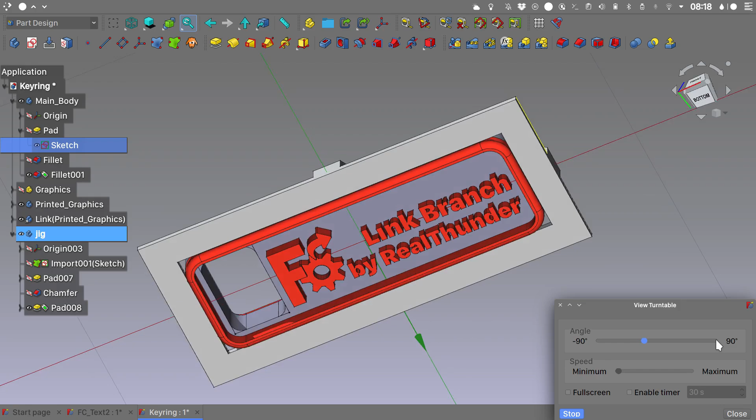In this video I will cover how to model our design in FreeCAD, how we can use Inkscape graphics for text and other shapes to be later imported in FreeCAD and used as a basis for extrusion. Then we will see how we can control our single extruder printer to create a multi-layered multicolor print.

Before we start, it is useful to do a quick recap of the softwares used. For FreeCAD, I'm using realthunder's link branch, and the latest release at the time of making this video is 0.1.11. You will of course find all the links necessary in the video description.

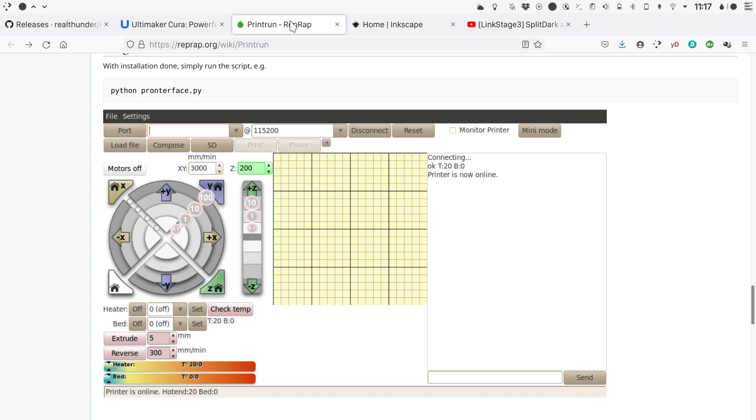We will use the Cura slicer for slicing our design, and in order to control our printer and achieve the multicolor layered print, we need to communicate with the printer via USB, and for that we will use PrintRun - a really simple to use and straightforward software for directly communicating with your printer.

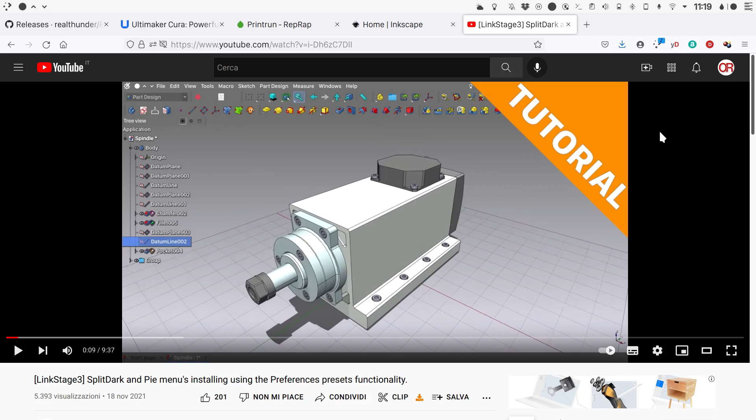For the SVG graphics we will use Inkscape, and if you like the way FreeCAD's interface is set up, there is also a quick and simple tutorial that I made on my YouTube channel, and you will find the link in the video description for that as well.

Okay, so assuming that our desired result is this 3D printed keyring, let's take it step by step and see how we can achieve our goal.

We start by firing up FreeCAD link branch and creating a new file. We will save this file as keyring, and as a first step we will switch to the Part Design workbench, and we will create a new body.

Right click on the body's name and we can rename it - I will call this body main body. Inside this main body container, let's create a new sketch. We will map it on the XY plane.

Okay, let's start by creating a rectangle. With the latest release of FreeCAD, we have some new options as well as some shortcut changes in the sketcher. I will choose a centered rectangle.

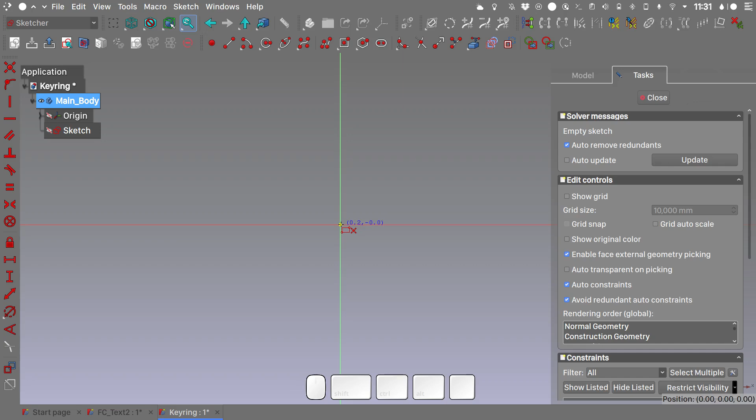Hitting the center origin of our sketch, I will create this rectangle, and you see that it is already constrained symmetric to the sketch origin. Select this edge here, and by pressing L on your keyboard we will give it a 60 millimeters length.

Of course you can always use the constraint icons, and the tooltip will give you a hint about the new shortcuts. I want this edge here to be 20 millimeters, so I on the keyboard for a 20 millimeters length constraint.

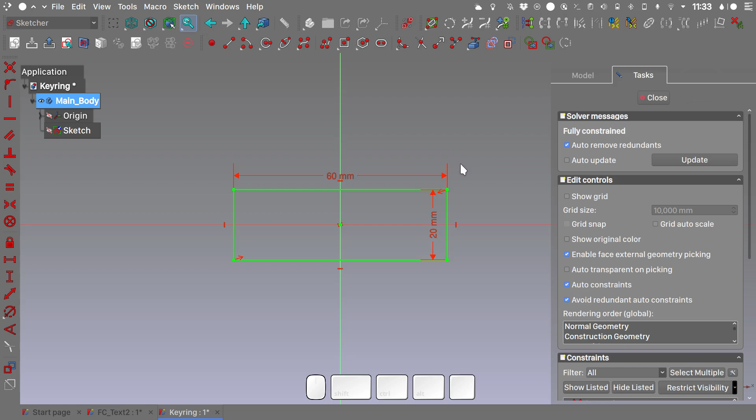If we take a look at our original file, switch to top view, we have this opening here, and I will model that as well.

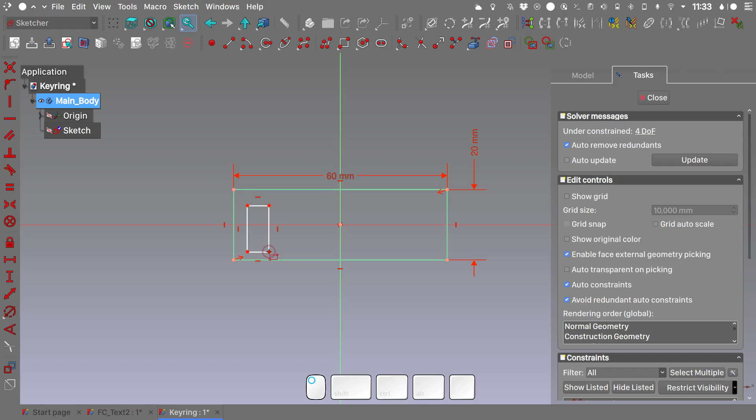So let's switch to a regular rectangle. We will draw a rectangle here, right click to dismiss the tool, select these two vertices and the x-axis of our sketch, S on your keyboard for a symmetry constraint.

Now switch to construction geometry. I will create a rectangle, right click to dismiss the tool, select these two edges, E on the keyboard for an equality constraint, and I want this edge to be L for a length of 2.5 millimeters.

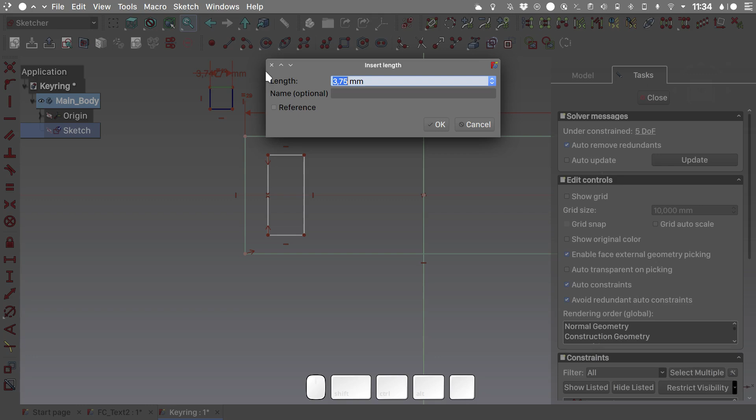Now what we will do is select this vertex and this vertex here, C on the keyboard for a coincident constraint - Ctrl Z, because I didn't want that. Let's try again - I want this vertex here and this vertex here, C on the keyboard for a coincident constraint.

And I want to do the same thing with these two vertices, C on the keyboard for a coincident constraint. Now we know that this edge here has a 15 millimeters dimension, and we can confirm that if we change to reference constraints - you can see here, 15 millimeters.

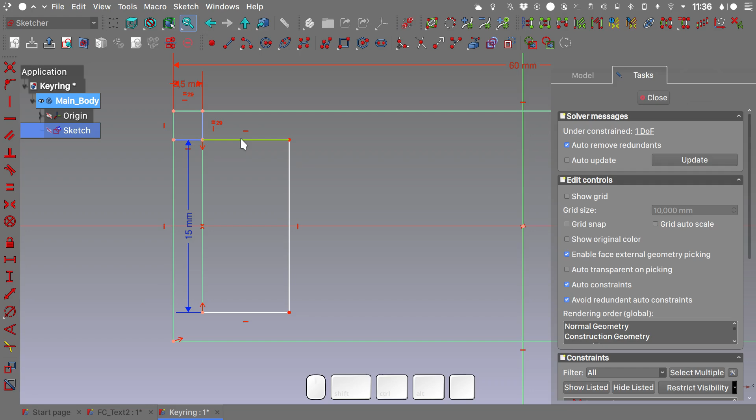Let's switch back to normal constraints. I want this edge here to be 10 millimeters in length, so L on the keyboard, 10 millimeters. Now with our sketch fully constrained, we need to close the sketch and we will pad it for 5 millimeters.

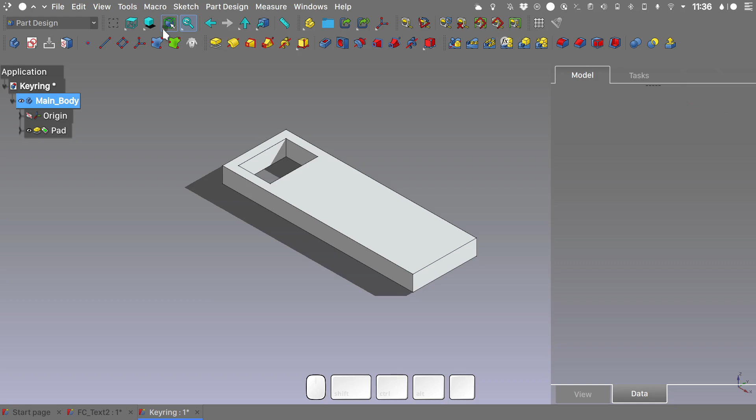I will switch to shaded view. You can also do it from here. You can switch through the various display modes.

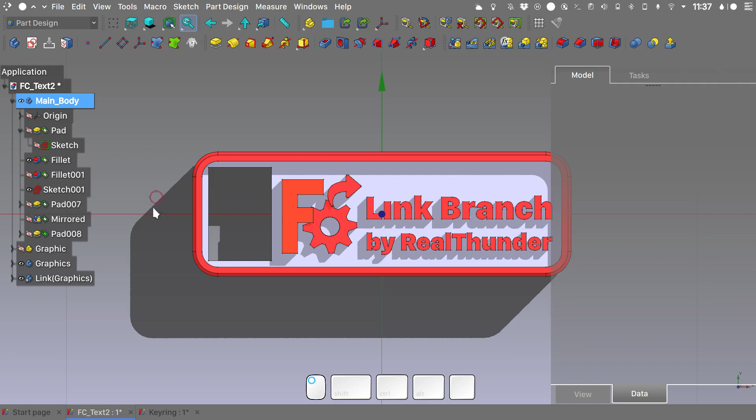Select our main body, Ctrl D on your keyboard to set a shape color. I want this shape to be something more dark, to reflect a little bit the color of my black filament. We will close this task, and taking a look at our reference model, we can see that we have some fillets.

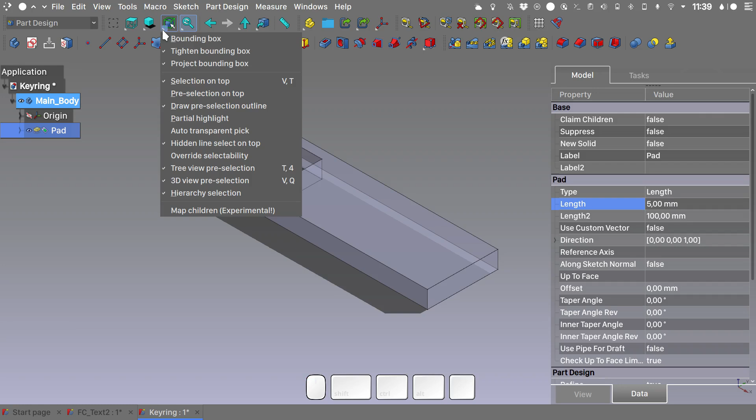So let's go ahead and model those. Select this edge here, and in LinkStage3 you can see how there is this really useful feature where the model becomes transparent and will permit us to select occluded edges or faces. This can be enabled from here, and choose selection on top if you want it, and this will help us select edges that are occluded by the model.

So use Ctrl on your keyboard to select multiple edges, and we will use the fillet tool to do a 4 millimeters fillet. Hit OK. I think that I want these edges here also filleted. So we will create another fillet, and this time perhaps 2 millimeters will be okay.

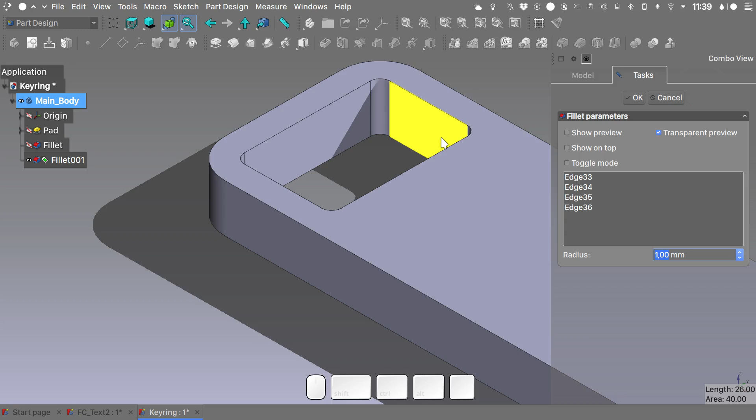So press 0 on your keyboard for an isometric view, and essentially with this we've quickly managed to model the base of our print.

Okay, so at this point, looking at our example file, we see that we need to create the graphics for the text and the FreeCAD icon. To have maximum flexibility, we will use Inkscape for this.

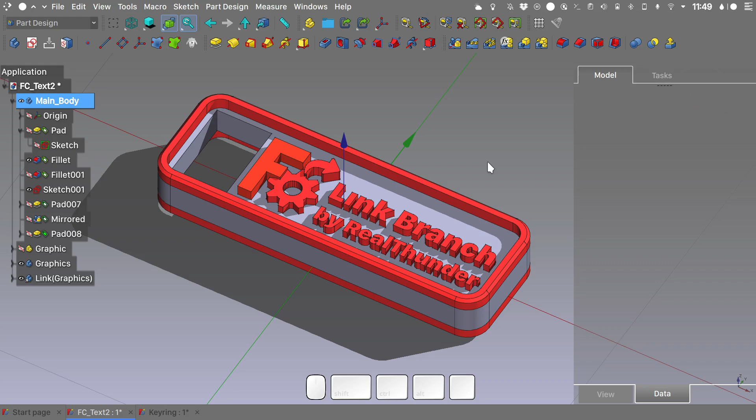So let's get back to our file, and let's try to have a better idea of the space in millimeters that we have to place our graphics.

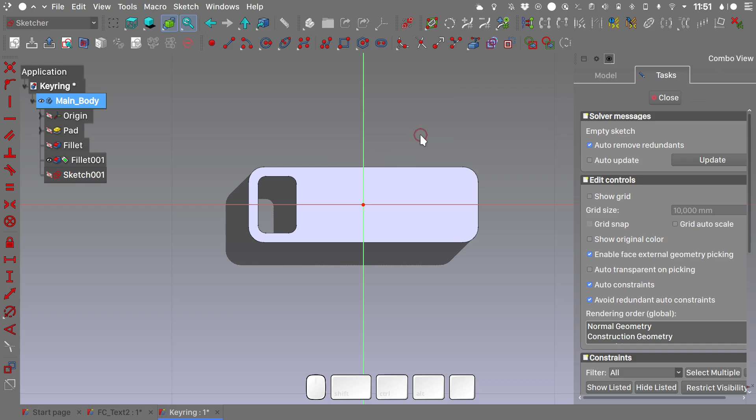I will create a new sketch only for reference on the XY plane. Okay, let's switch to wireframe view. I will create a construction rectangle.

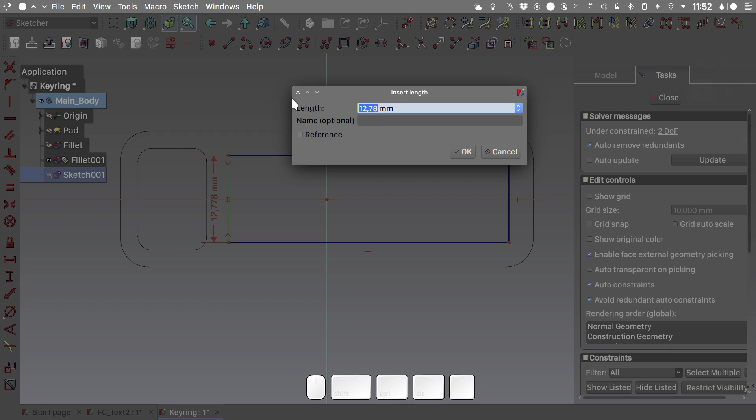Let's select these two vertices and the y-axis and the x-axis of our sketch, S on the keyboard for a symmetry constraint. I want this edge here to be I on the keyboard 15 millimeters, so it will match with our hole, and I think that this edge here could be L on your keyboard 43 millimeters, and we're pretty much inside our print area.

We need to keep in mind these dimensions, because the Inkscape file will use these dimensions for the page. So with these dimensions in mind, let's fire up Inkscape, and I will simply open the FreeCAD link branch icon.

Let's click OK. And in order to have an easier life importing in FreeCAD, we need to tweak some document properties in Inkscape. If we remember well, the width of our document is 43 millimeters, and we need to change the unit here in millimeters.

So width 43 and height 15 millimeters. Press 5 on your keyboard to see the whole document, and this way we make sure that we stay in the area that we have free for printing.

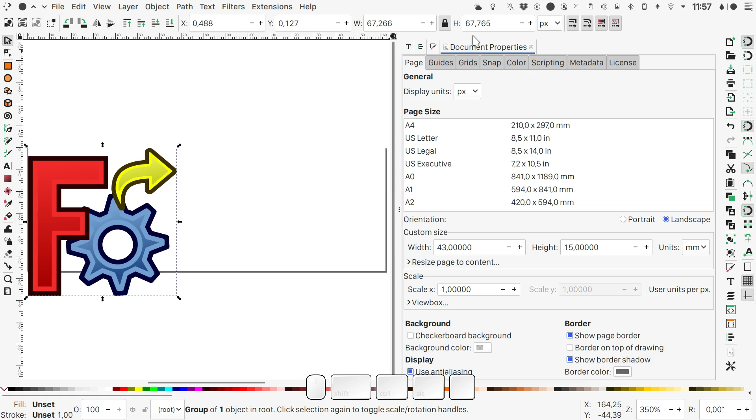Let's select our icon, and because I want to preserve the aspect ratio, I will hit this lock icon, and I will make it a height of perhaps 12 millimeters.

And of course we need to change the unit here as well in millimeters. Let's try again, 12 millimeters.

Click the Align and Distribute icon. I will select the page as the relative reference, and I will center the icon on the page by clicking this, and I will also move it all the way to the left.

Now we will create some text. With our text created, we need to be aware of the fact that FreeCAD will have difficulties importing SVG graphics that are not in a path format.

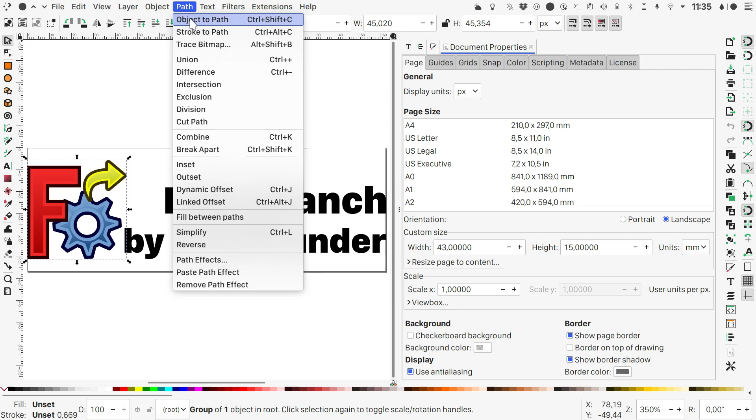So with this in mind, we will select our icon here, we will go to the Path menu, and we will select Object to Path. The same thing we will do with the text, so select the text and Object to Path, by realthunder Path, Object to Path. Now that we have our file ready for importing in FreeCAD, we will go to File, Save As.

I will save this file as path graphics as SVG, and as file format plain SVG. And let's get back to FreeCAD.

This sketch isn't necessary anymore, so we can clean our tree by deleting it. It was just a reference sketch.

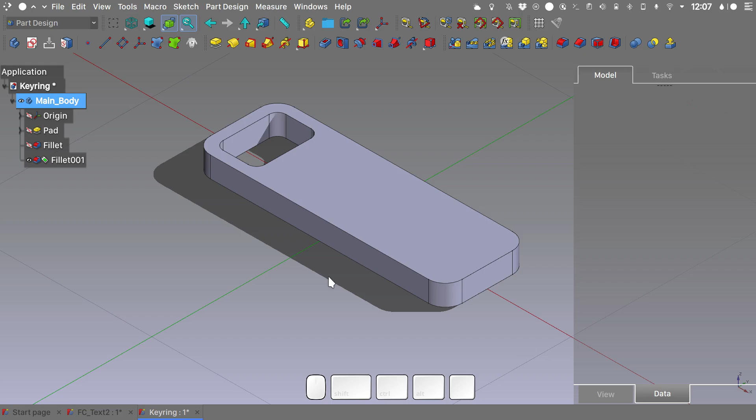Now let's go to File, Import, and we will import our path graphics SVG. We will import as geometry, select, choose yes, hide for a second our main body, switch to top view by clicking 2 on your keyboard.

One thing that I like to do is to group them under a new part, and this way you will see where the origin of this geometry is. So select all the paths that we have imported in FreeCAD by using Shift, and let's drag them inside our part. I will rename this part, and I will call it graphics.

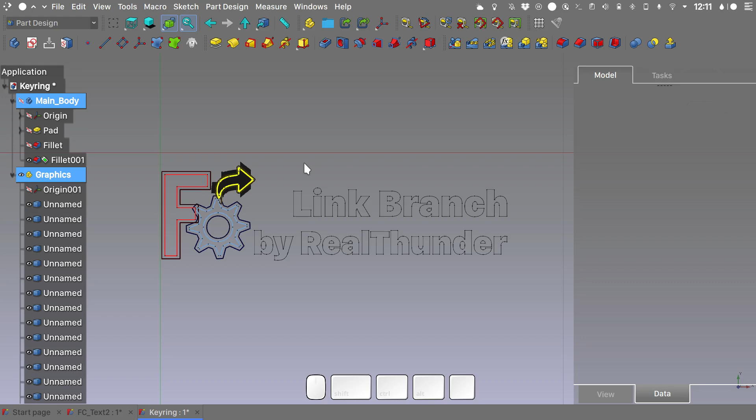Let's start the process of transforming these paths into something usable for the part design to model geometry. If we take a look at our example file here, we can see that the graphics are made by pads that take as a reference some shape binders. This just to make you understand what we are trying to do here.

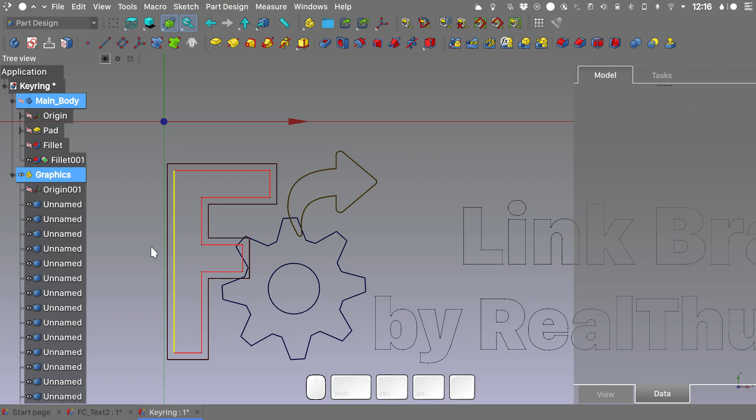Back into our working file, we need to clean this geometry a bit, so I will select some of the paths that I don't need and delete them. This one also. Hit delete on your keyboard. If you hover with the mouse over the various bits and pieces in the tree view, you have a highlight in the 3D view, so you can see what's going on. Also, because I've tried this previously, I know that this path here will be a problem, and I'm deleting it, so bear with me. Now our goal is to use these graphics as basis for pads.

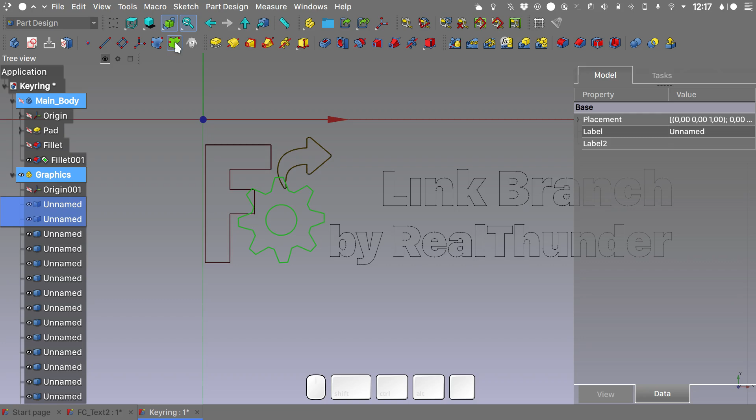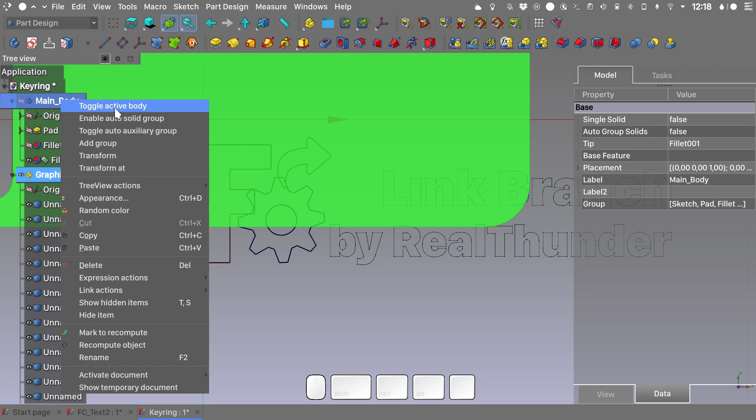To do this, we will use a really cool feature of the green SubShapeBinder, and that is the fact that it will try to detect closed areas and make a face if possible. Another thing to bear in mind is that at the moment we want to create our SubShapeBinders outside of these two containers that we already have. So let's click on the main body, and we will toggle the active body so it is not active anymore, and you can see that the highlight has disappeared. Also, we will toggle the active part.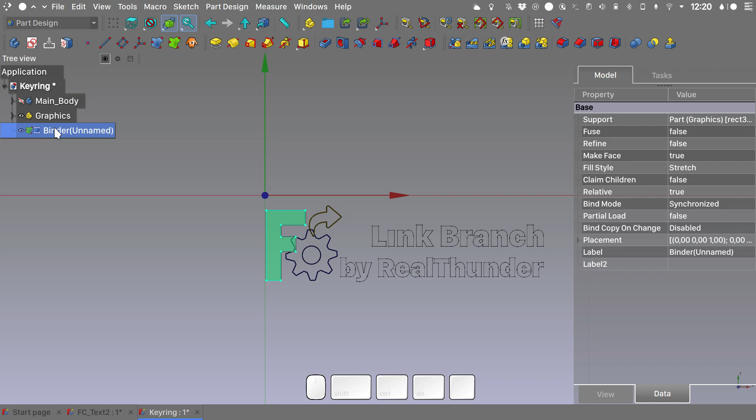So let's start this process with the path for this F here. Let's find it in the tree, select this path and hit the green SubShapeBinder. You can see that it has created the SubShapeBinder in the main branch of our tree. I will rename it, so F shape, and we will slowly do the same with the rest of the graphics.

If we take a look at our gear here, we can see that we have an outside outline but also the inside. If we select only the outside, the green SubShapeBinder will create a unique face. But if we select the outside path and the inside one, the SubShapeBinder will be smart enough to leave the hole here free. So let's try it and rename our new SubShapeBinder as Gear Shape.

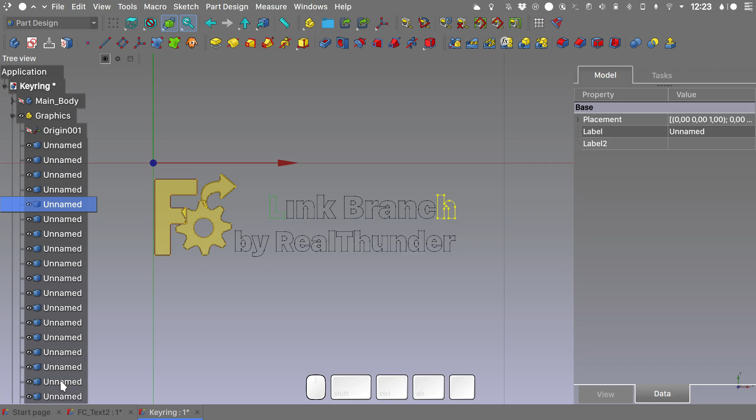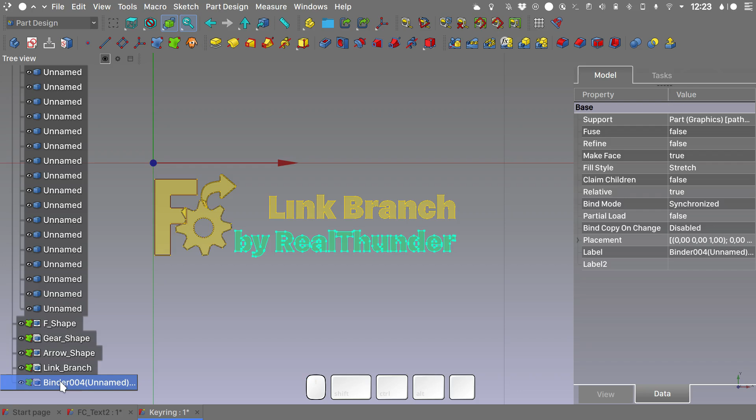Let's do the same with this arrow here, rename Arrow Shape. Now we need to move on to the text. So select the first path of the link branch text and try to find the path that represents the H. Hold Shift, select everything and hit the SubShapeBinder. Let's rename this as link branch, and we will do the same with by realthunder. Let's try to find the first element, hold Shift, select the last one and create a new SubShapeBinder. Rename it, and this way we have created SubShapeBinders for all of our graphics.

These SubShapeBinders can now be used to create pads or pockets in our geometry. Let's hide this. One important thing when you create SubShapeBinders: you need to make sure that the make face property is set to true, in order to have the face created when the ShapeBinder detects a closed area.

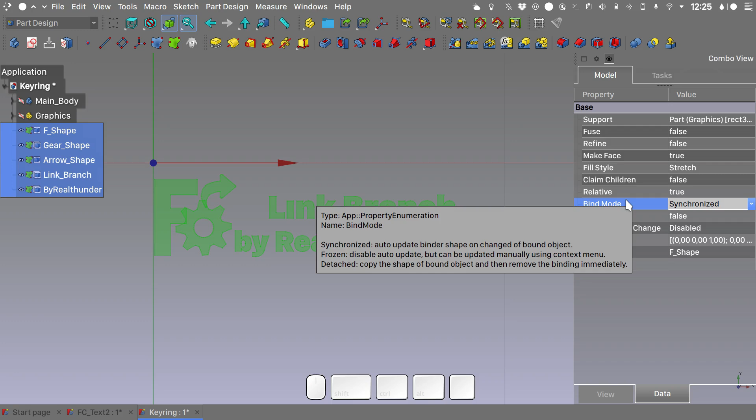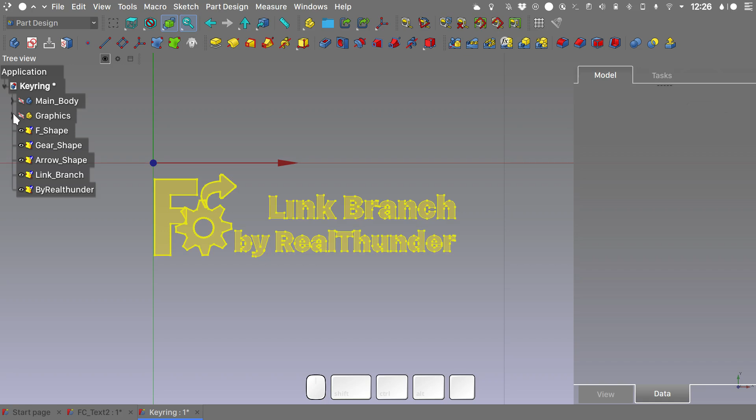Another important property of this SubShapeBinder is called the bind mode. By default, the bind mode of the SubShapeBinders is set to synchronized. It is really useful to read the tooltip for this property, because it will give you some really interesting insights into how SubShapeBinders work. For our model here, we need to set the bind mode to detached, and you can see that the SubShapeBinder icon has changed. What does this mean? This means that now the SubShapeBinder won't follow any changes made to the graphics anymore, so it is like a frozen in time geometry at this stage.

But also this will permit us to place the SubShapeBinders in a new body and move them freely in the 3D space. If this property is set to synchronize, the SubShapeBinder was designed to stay in place of where it was originally created and to follow the geometry of the binded object, and that is useful for top-down modeling.

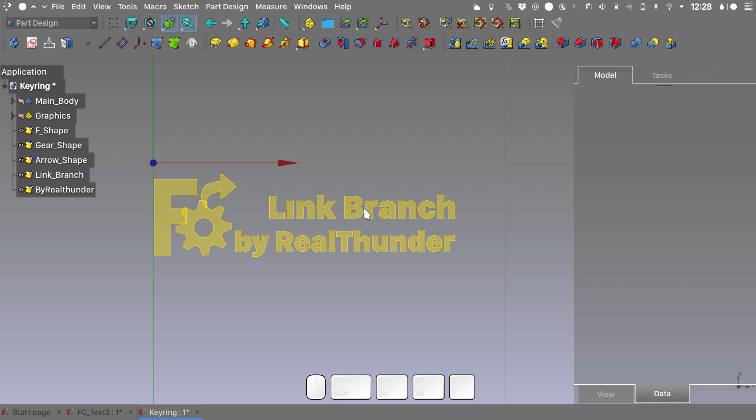Again, for our intent here, we need to have them detached. Okay, so now with our graphics prepared and ready for modeling, we will create a new body.

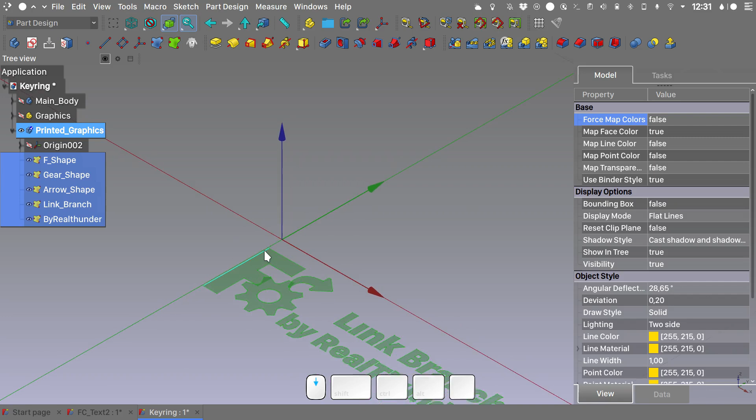Let's rename it as perhaps Printed Graphics, and selecting all of our SubShapeBinders, we will drag them inside our newly created container. We will select our SubShapeBinders because we want our extrusion to be red. Hit Ctrl D on your keyboard and we will set the shape color to something like a red color.

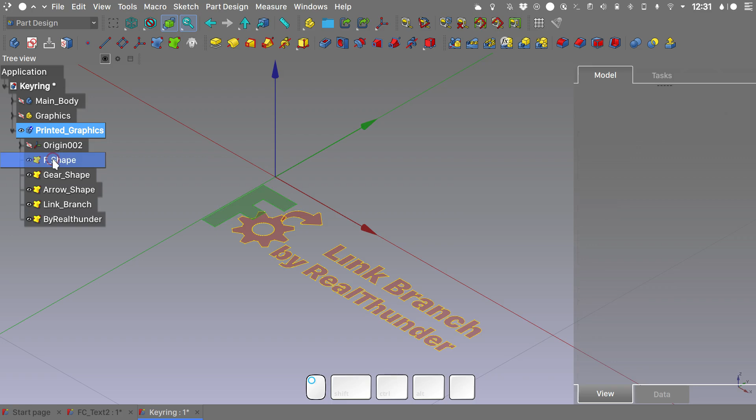Now, this hasn't done anything special, it only changed the color of the faces on the binders. And now if we make our extrusion, you can see that the F is now red. I want this extrusion to be 2 mm in height.

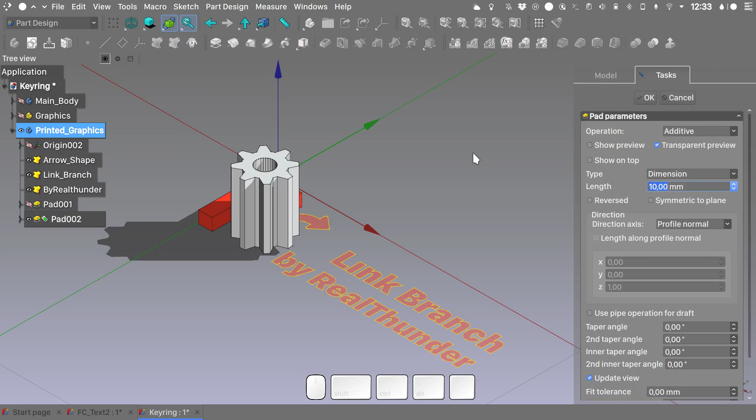Hit OK. Let's switch to shadow mode, and we will do the same with all the other geometry that we have here. I will pad the gear for 1.5 mm, and the arrow we will pad it for 2 mm also.

And with this we have created our graphics to be placed on top of the main body. What we need to do is to transform our shape. So let's switch to front view.

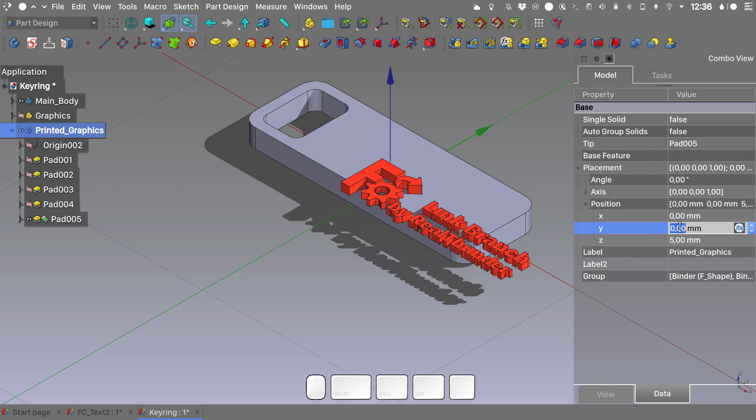Hit OK, select the printed graphics, go into data of the properties view and expand the placement entry position. We want our body to be in the Z direction at 5 mm, in the Y direction at 7.5 mm, because this way it will be centered with our main body.

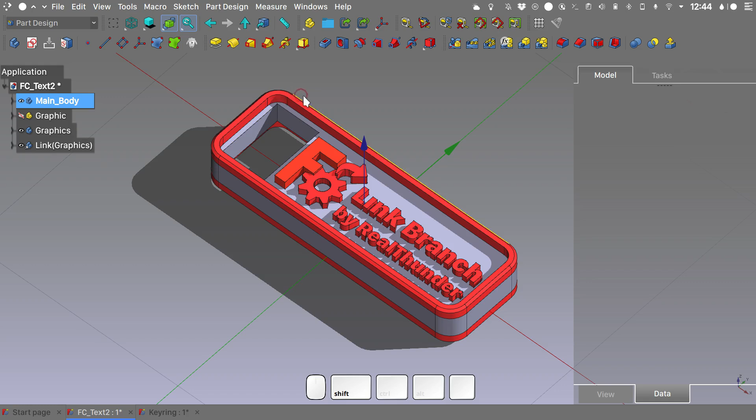So select it again, and for the X position we can make it something like -16 millimeters. Okay, so now if we take a look at our example file, we need to create this outer perimeter extrusion. So let's get back to our file.

With our printed graphics body active, we will create a new sketch. We will map it on the XY plane, hit OK. We need to import some external geometry, and I will import this arc here and this arc here.

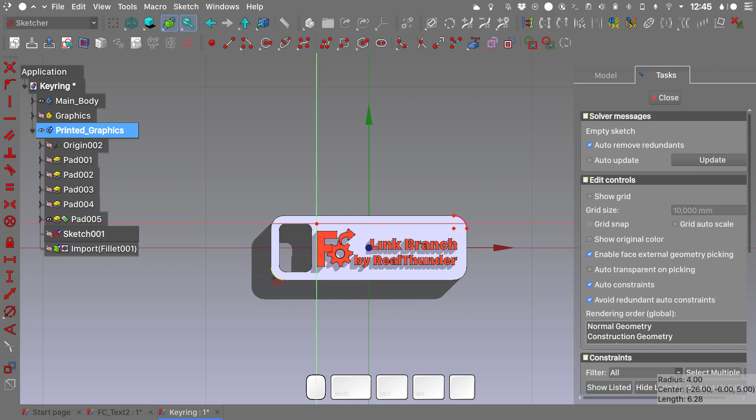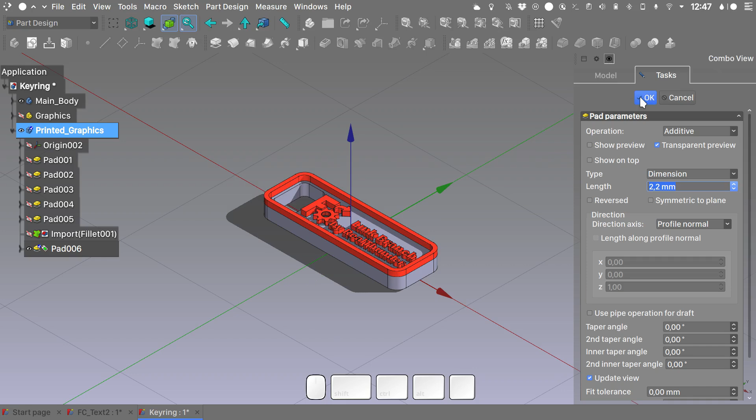Let's close our sketch, switch back to shadow mode. I will pad my sketch for 2.2 millimeters. Hit OK, and one thing that I would like to add is a fillet on this edge, and hit OK.

Okay, so we have our top body print modeled, and we need a way of creating the bottom one without going through all the modeling. For this, we will take advantage of the link functionality in FreeCAD, and with this technique, the advantage is that whatever changes we made to our printed graphics body will reflect for the underside.

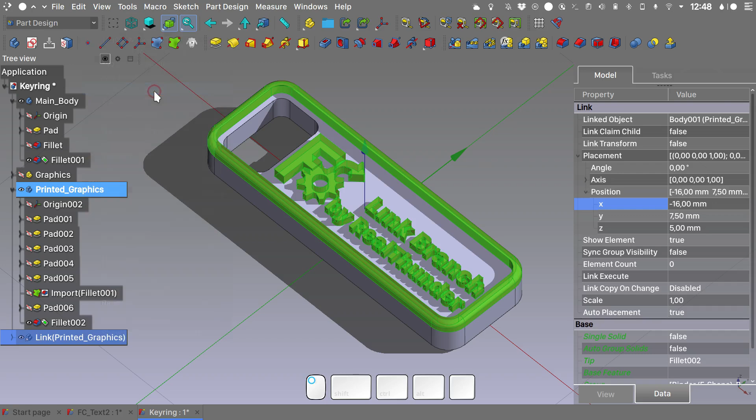So select the printed graphics, hit the make link icon, and we have a link of the printed graphics. Right click on the entry in the tree view, click transform, and we will rotate it by 180 degrees. Hit OK.

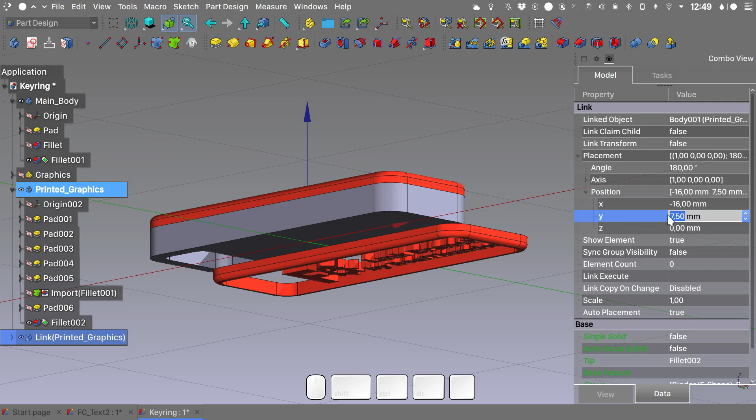If we select our link in the property or combo view, we will tweak its position, and I want it to be at 0 millimeters height, at 7.5 millimeters on the y-axis and -16 millimeters on the x-axis. And as you can see, we have perfectly placed our new body where it needs to be.

Okay, so this pretty much wraps up almost all of the modeling part of our tutorial. It is now time to get to our printer. So we will start with the easy part of printing with the black filament, the main body.

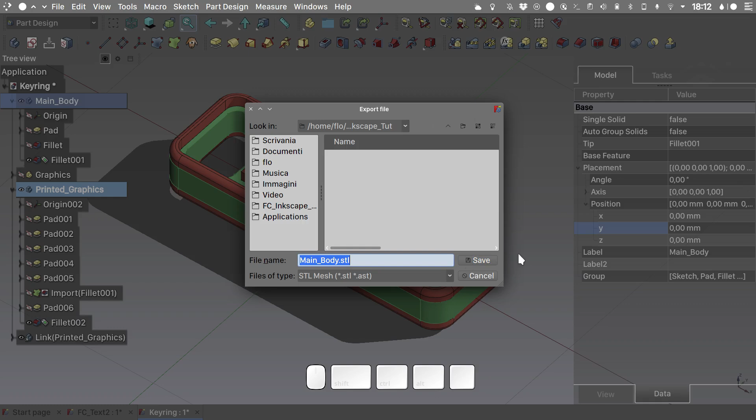So we need to select our main body container in the tree view. We will go to File, Export. We will choose STL mesh as file type, and we will name it main body STL. Let's save this export to a known location, and now it is time to fire up Cura.

And then let's open our file. So File, Open Files. If we select our mesh, one important thing that we need to keep an eye off is the positioning, which in this case is at the origin.

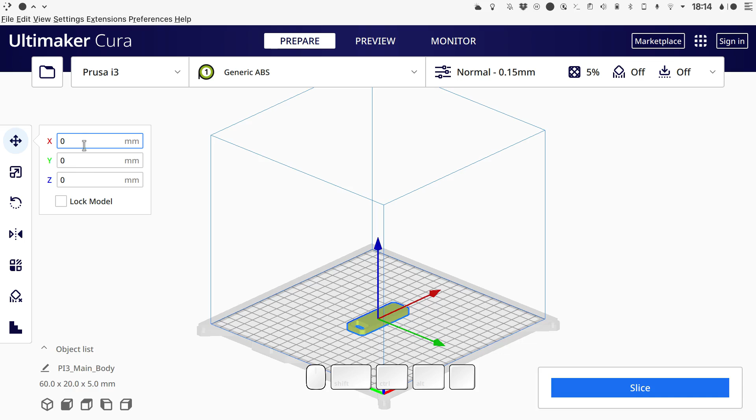As printing profile, I have a generic ABS printing profile, and because I know that this particular type of filament will shrink a lot, I usually scale my mesh by 2% in uniform scaling mode. Some other relevant settings in my case is the layer height at 0.15 millimeters, and I have a 5% infill density, and skirt as build plate adhesion, as this will purge the nozzle before starting the main print.

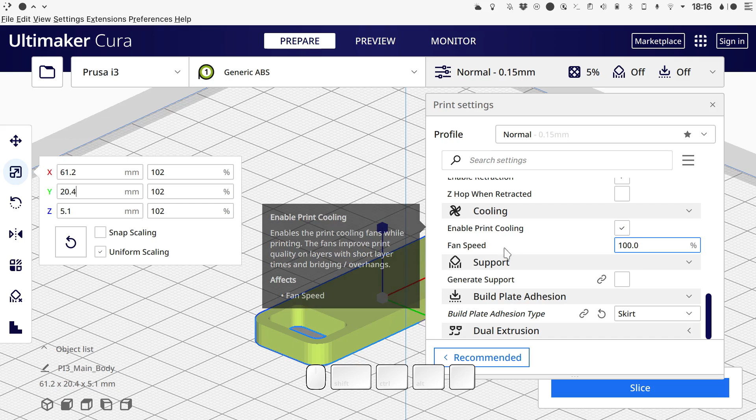Let's slice it and save to disk in order to send it to the printer, and we are finally ready to print our first component.

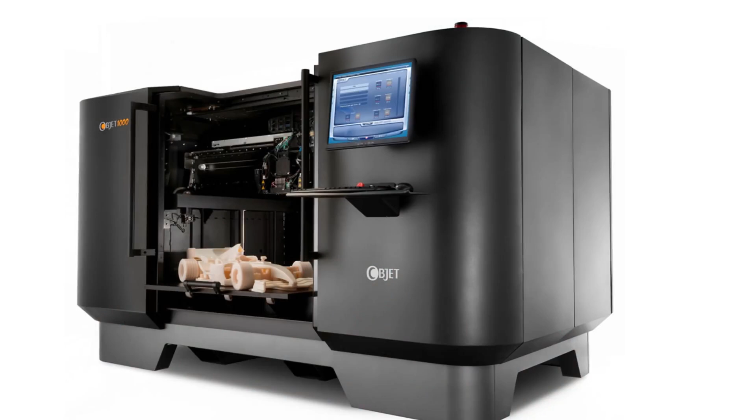Now that our first component is printed, we need to get a bit intimate and understand more how our printer works. Our printer is controlled by Gcode, the basic programming language used for almost all CNC machines, including 3D printers, routers, and laser engravers. It instructs the machine on how to move, heat, and perform other actions.

Most printers have a way of communicating with them via USB or Wi-Fi connection, and in my case I'm using a USB connection via an application called PrintRun. But of course you can use whatever application is provided with your specific printer.

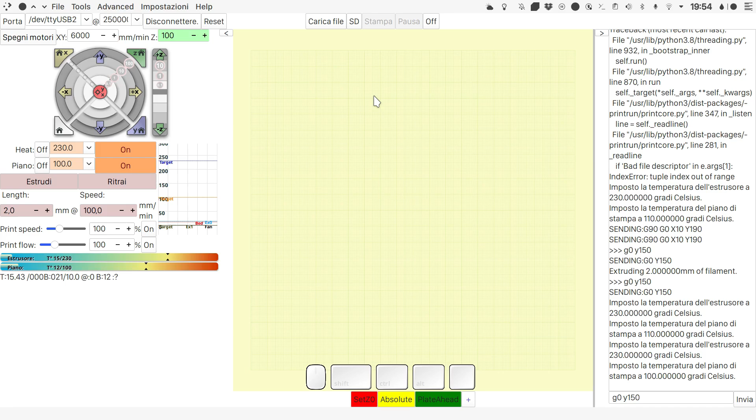So getting back to our design, we can see that we need to print our red graphics on top of our main body. Here rises the first problem that we need to overcome. When we slice this geometry in Cura slicer, it will include in our Gcode file a routine for homing all axes. The problem is that we need to print the graphics offset from the print bed, and for that we need to eliminate the z-axis homing routine.

Before we start, let's take a brief look at the G-codes that we might use for controlling our printer. The first ones are G0 and G1. G0 is used for rapid motions, as fast as our machine will go, moving the cutter or extruder through air to the next place it will be cutting or printing. Instead, the G1 code will feed the motion slower in a controlled manner.

The G90 and G91 codes are used to switch from absolute coordinates to relative coordinates. G90 switches to absolute coordinates, instructing the machine to use the absolute coordinates of the machine, while G91 instructs the machine to move relative to its last position.

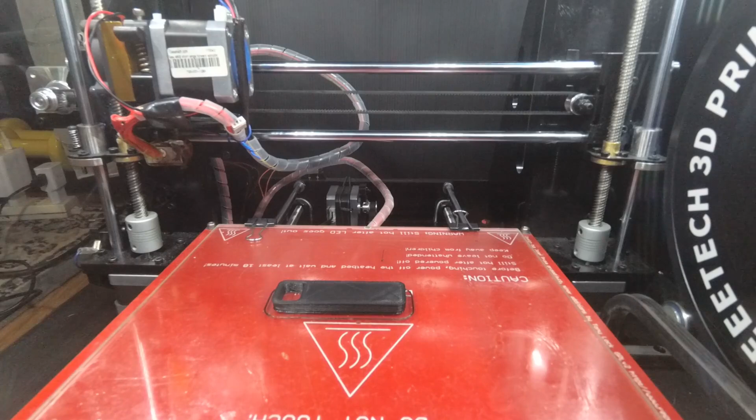Now that I'm sure the extruder won't crash into my print, I will home my y-axis. Here comes another command we need to learn: the G28 command, used for the homing routine. If we do a G28 x-axis and G28 y-axis, the machine will be homed in the X and Y direction, and this way we've issued our first commands to the printer.

Now that we are able to control our printer, let's take a look at the G92 command, which will be really useful for what we want to achieve. The G92 command on a 3D printer specifies the current location of the nozzle. Telling the printer where the nozzle is located may seem unintuitive, but this command can be super helpful, especially when it comes to setting offsets.

As an example, if we switch the coordinate system of our machine to G91, relative to the current position, we can issue a G0 Z minus 20 millimeters command, and we can see the extruder will move 20 millimeters down from the current position. If now we issue a G92 Z0 command, this will instruct the machine that the current position of the extruder is actually the Z0 position. This is essentially everything we need to print with an offset from the plate, but with the benefit of understanding how things work.

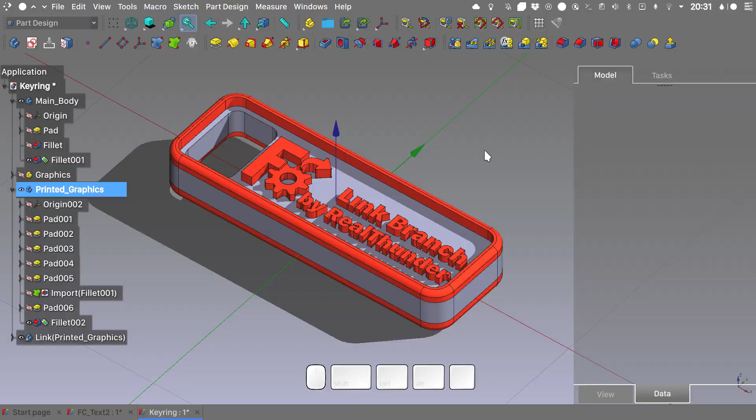Now let's get back to our file. I want to export the printed graphics, so I'll select it. Let's go to File, Export, and we will call this file Printed Graphics.

Let's switch to Cura Slicer, and I will import my printed graphics STL file. Let's select it and make sure that it is always in the 0 position, centered on the plate. Now in Cura we need to change some slicer settings, and the setting we need to change is the build plate adhesion, which we will change to none because it will essentially be printed in the air.

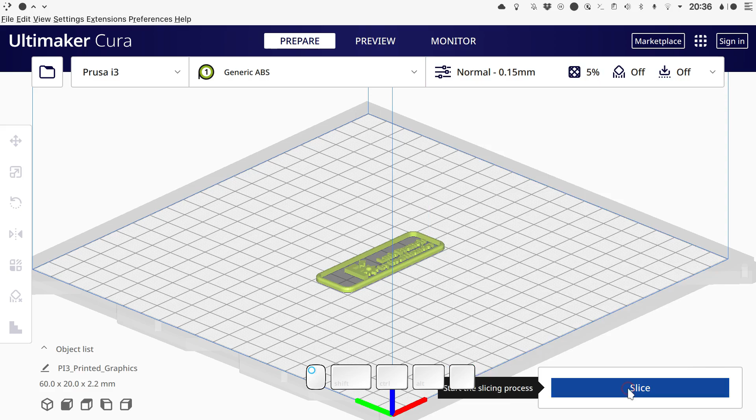Let's slice our mesh, save it to disk, and open the Gcode file with a text editor. We need to understand that Cura Slicer will rightfully introduce a homing routine for all axes, but in our case we need to avoid the homing of the Z-axis because it will crash with our previously printed object. If you remember, the command for the homing routine is G28, and if we look at the beginning of our file on line 24, we have a G28 Z0, which is the homing routine for the Z-axis.

We need to get rid of this line of code and leave only the G28 X and Y homing routines. We eliminate the Z homing routine because we will manually set the Z height for the extruder. So delete this line, save our file, and send it to the printer. It is now time for a filament change.

Okay, so with our filament changed, let's move the plate to a safe position and purge the extruder until the red color comes out.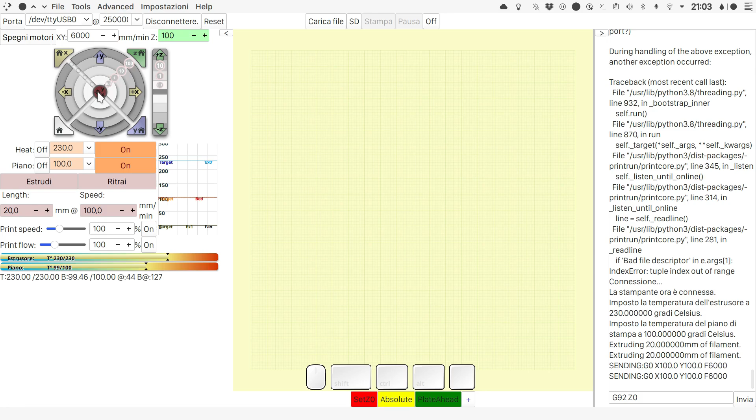And now we need to instruct our printer where the Z0 position is on top of our previously extruded component. We will slowly lower the extruder, taking great care not to bump into our print. When we are really close, put a piece of paper on top of your print and slowly lower the extruder until it is in contact with the paper.

At this point, we need to instruct the printer that the extruder is at the Z0 position. So we will send a G92 Z0 to the printer, and we can load the printed graphics Gcode file and send it to the printer.

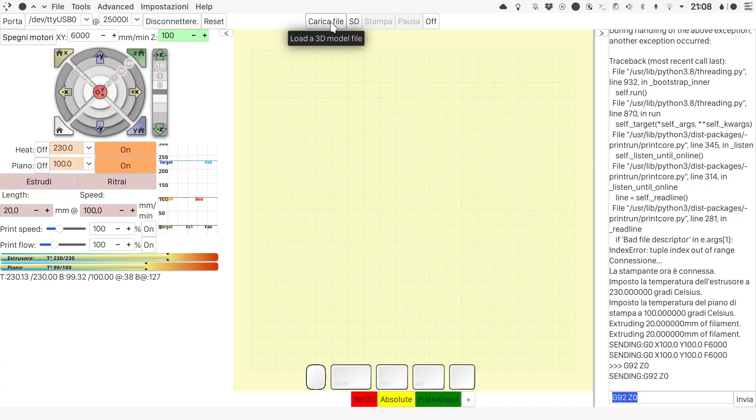Bear in mind that this file, if we take a look at it again, has a routine for homing the X and Y axis, but we removed the Z axis homing because we've manually set the Z offset using the G92 command. So let's try and print it and see how it will end.

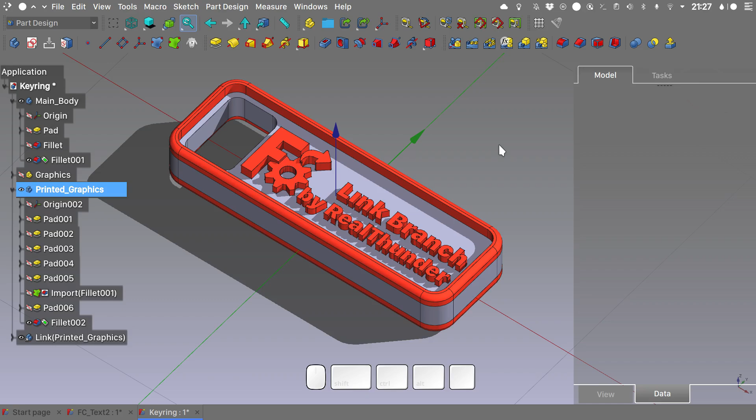So we have our second step of our print completed successfully. We need now to print the bottom side of our keyring. In order to do this, we will need to turn around our current print on the printing plate and print the underside.

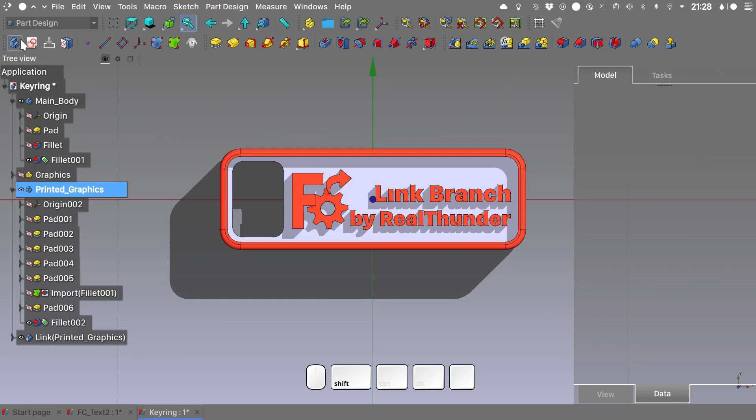But in order to have a correct positioning of the geometry, we will create a jig around the keyring. Let's create another body, and rename this body as jig. We will create a sketch on the XY plane.

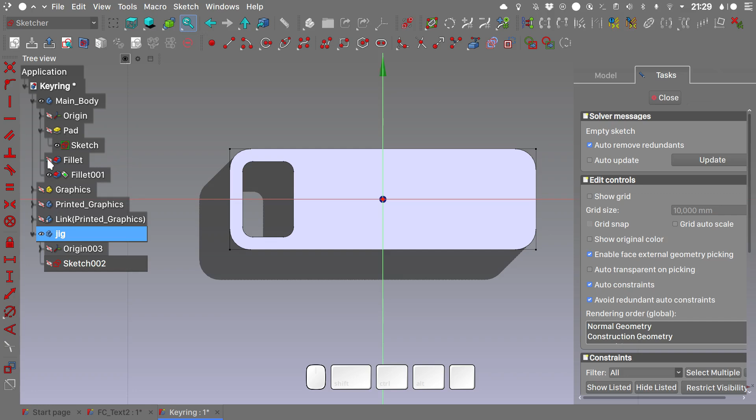And let's import some geometry from here. So we will use the import external geometry. I want to import this and this one. I will create a rectangle.

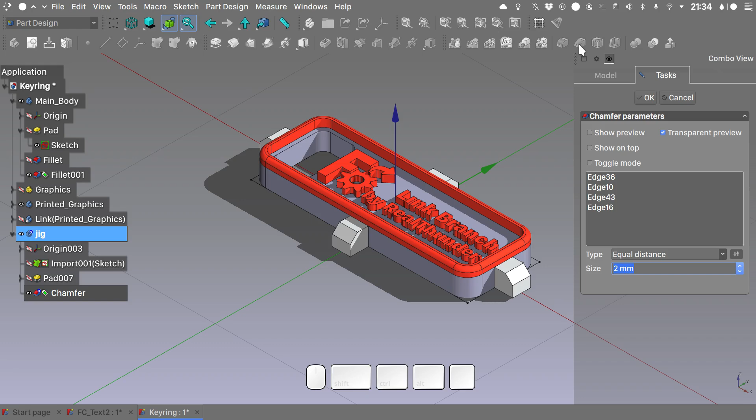With our sketch created, let's re-show the geometry. I will pad the sketch for 5 millimeters. It's okay, so let's quickly chamfer some edges here for 2 millimeters, or perhaps even 3. Hit OK. Let's create another sketch, always on the XY plane.

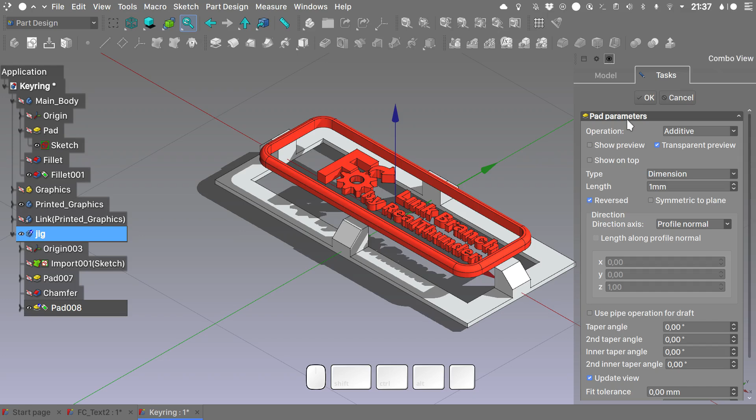Once modeled, we need to select our jig. We will export it as jig, open it in Cura, slice it, and print it on the bed.

Perfect. With this step achieved, we have now our jig in place and printed. We have placed the keyring already in there, and we have to go through the same drill of homing the X and Y axis and setting the Z height in order to print our graphics on top of the keyring. So we will do just that.

We will now home the X axis. I will home the Y axis also. We will use the same technique with the paper and slowly lower the Z axis until it is in contact with the print. Once we are happy with our positioning, we will need to set the zero height for the Z axis. So again, we will issue a G92 Z0 command to the printer.

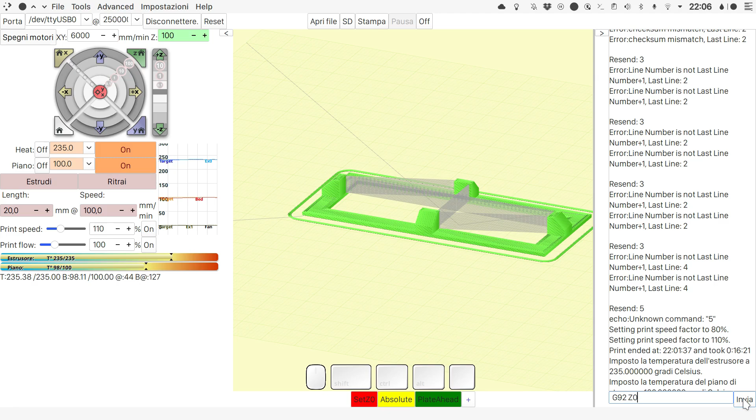Now that we have our printer nicely set up with our X and Y axis homed and the Z position manually set, I will again open the graphics Gcode file and send it to the printer.

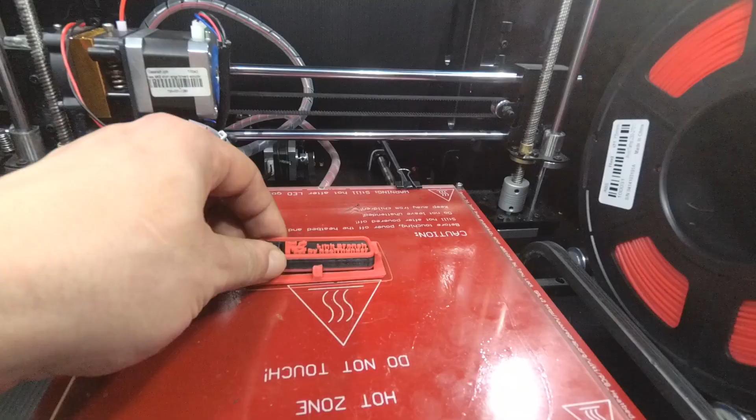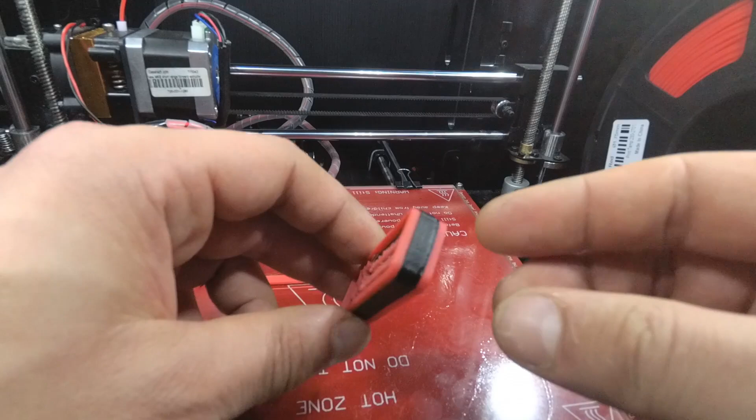Okay, so hoping that this tutorial was useful for learning how to model and print a multicolor object using FreeCAD, I thank you for staying till the end.